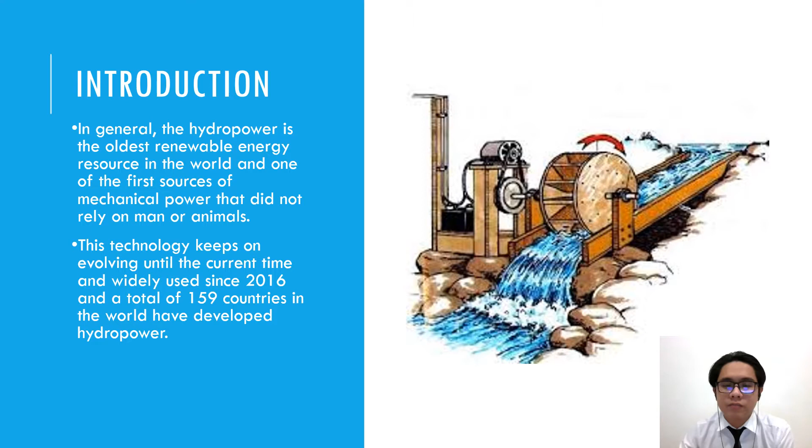This technology keeps on evolving until the current time and was widely used in 2016, and a total of 159 countries in the world have developed hydropower. Hydropower has numerous types of sizes, which are categorized as large and small hydropower plants. The small hydropower plant consists of 4 types, which are small, mini, micro, and pico, and the table below shows the power consumption for each type of plant.

Pico-hydro is mostly applied in rural areas due to its lower power consumption. As for this research, pico-hydro will be focused on as it is more suitable for smaller consumers and has lower power consumption.

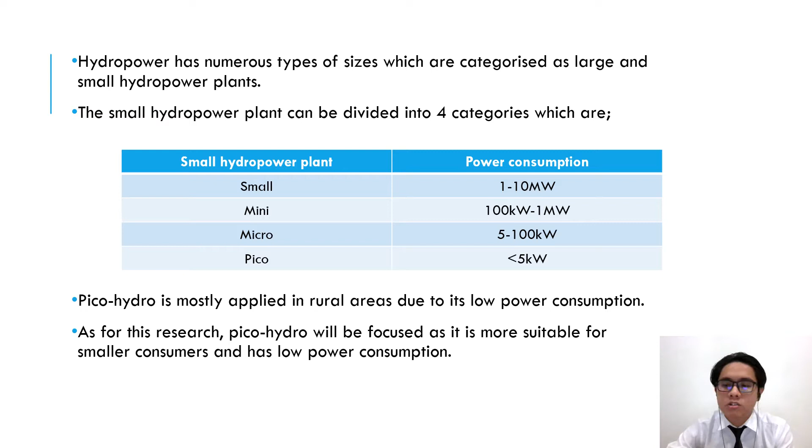This slide shows the problem statement of the current study. The application of the turbulence model into the numerical scheme can produce a huge difference to the simulation results. However, different models produce different simulation results. This is due to the boundary conditions that have been set and also depends on the complexity of the model. It is important to choose a suitable turbulence model which can help achieve the convergence results. With the results, the simulation data obtained will be relevant and also reliable.

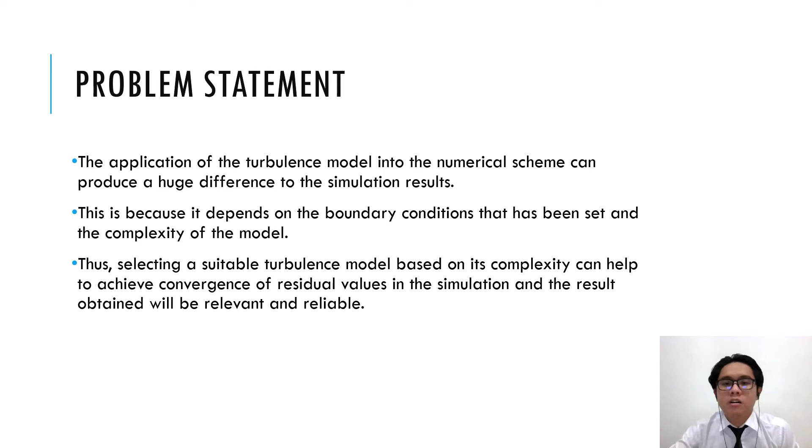In this slide, the objectives of this research are: first, to perform CFD simulation of the pico-hydro and previous mini-hydro design. Second, to compare the simulation result between the pico-hydro turbine and the previous mini-hydro turbine. Third, to observe the effect of the nozzle applied on the system.

This study will focus on performing the CFD simulation of the pico-hydro turbine. A turbulence model is used to determine the convergence result. However, the research can only monitor the performance of convergence at a limited level due to the limited use of the CFD software.

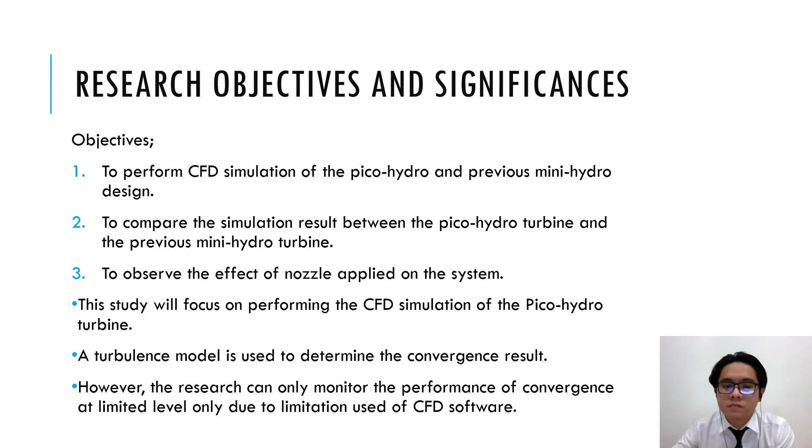For the literature review, first is the Finite Element Analysis (FEA) software. FEA is a program used to solve various complex issues in any scientific and engineering field. Various types of models, such as structures, machine components, or nozzles, can be analyzed using the FEA method. FEA can analyze the behavior of the models in terms of strength, fluid flow, elasticity, and other elements. During the FEA, the boundary conditions are determined, and it is reduced to the understanding of the restrictions on the model without worrying about its mathematical form.

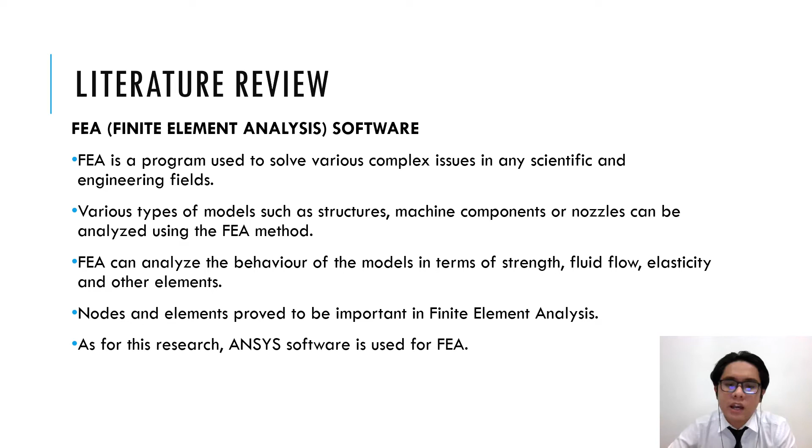It is important to consider the selection of the number and type of finite elements because it has a high impact on the time needed to obtain accuracy and results. It is also necessary to select the appropriate shape of the finite element, which includes the number of nodes on each of its edges. Nodes and elements prove to be important in finite element analysis. As for this research, ANSYS software is used for FEA.

Next is turbulence modeling. As you can see, this table shows the comparison between turbulence methods or models. The main purpose of turbulence modeling is to assist equations to predict the temperature fields, time-averaged velocity, and pressure. With this modeling, there is no need to calculate the complete turbulent flow pattern as a function of time, as in large eddy simulation and Reynolds-averaged Navier-Stokes equations. As for this research, the Spalart-Allmaras model is used as the turbulence model.

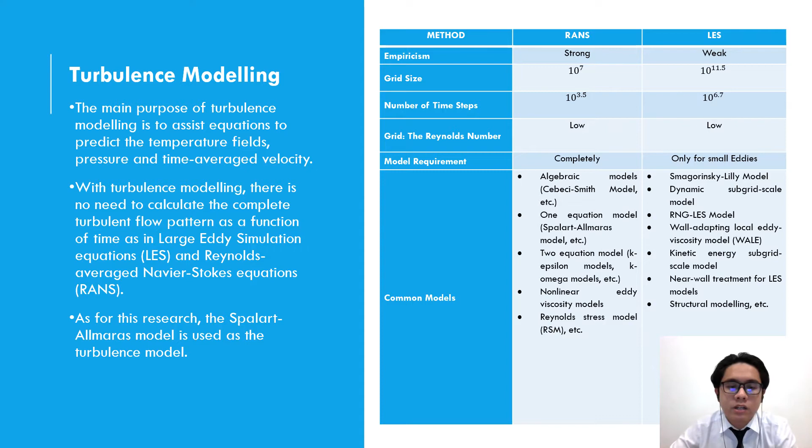For this slide, it shows CFD convergence using residuals. As you can see, this figure shows an example of the residual monitors. It is the main tool for judging convergence because it can monitor the solution of the basic equations for the CFD simulation. The simulation includes equations like pressure, turbulence, and momentum. After that, the solver will conduct iterative solutions for these equations. As a result, the difference between the solutions of these equations can be seen throughout the residuals plot.

There are various root mean square, or RMS, residual levels: 10 to the power of -6, which is tightly converged, 10 to the power of -5, which is well converged, and 10 to the power of -4 and -3, which are loosely converged. As for this research, the RMS residual level of 10 to the power of -3 is used due to the limitation of the software.

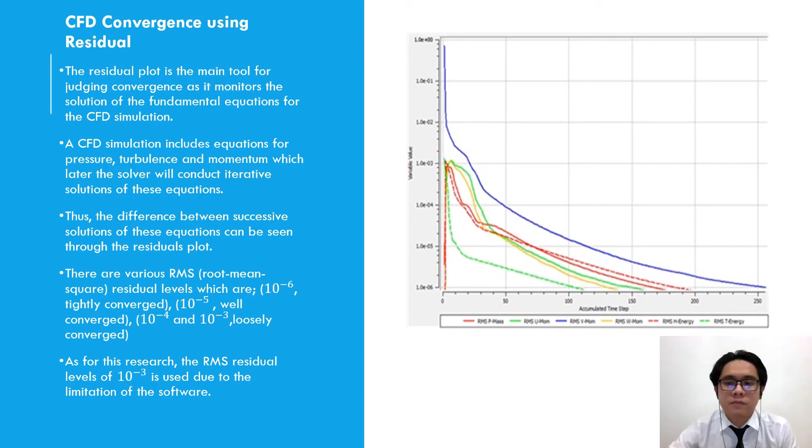The volume flow rate of 0.5 × 10^-3 m³/s is used as the boundary condition at the inlet of the pipeline, with the density of water being 997 kg/m³. Using the residual level of 10^-3, the residual values obtained are converged and the simulation result can be obtained.

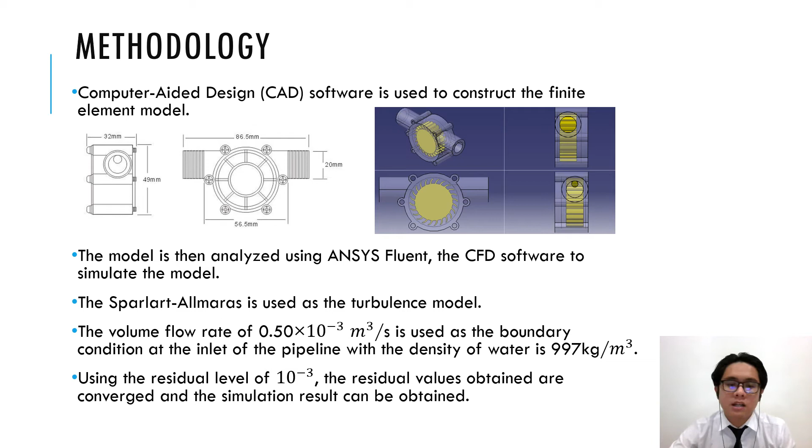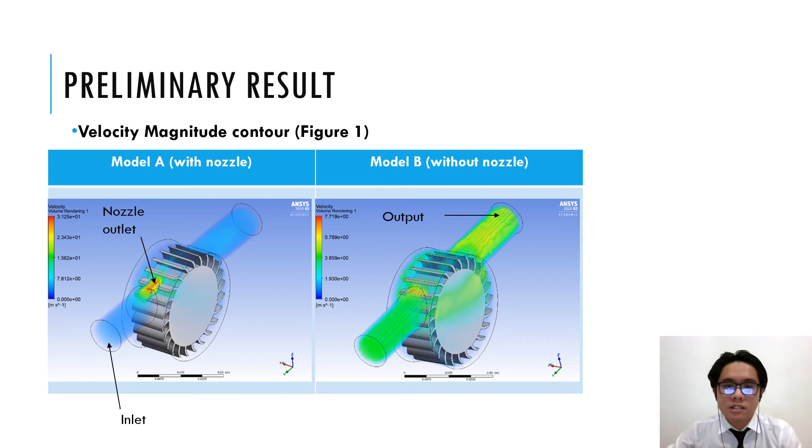As for this slide, it shows the preliminary result, which is the velocity magnitude contour. Based on these two figures, there are two models, which are Model A, which is with nozzle, and Model B, which is without nozzle. It can be seen that the average velocity for Model A is higher compared to Model B. This is due to the existence of the nozzle that has been applied in Model A.

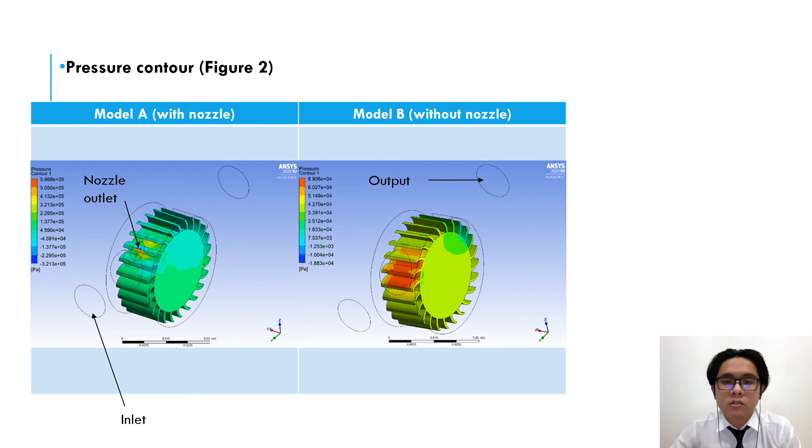Next is the pressure contour. Based on these two figures, we can see that the average pressure for Model A is higher compared to Model B. This is also due to the existence of the nozzle that has been applied in Model A.

Next, we discuss the simulation result. First is the average velocity and pressure of the base model. Based on this table and both figures from the previous slide, Model A shows higher velocity and pressure at the nozzle output. However, Model B has a lower velocity and pressure when there is no nozzle applied on this model. To ensure the efficiency of the blade, the blade is best put around this area. As a result, Model A proved to satisfy the purpose of the nozzle as it produces a higher water velocity at the nozzle outlet than at the inlet.

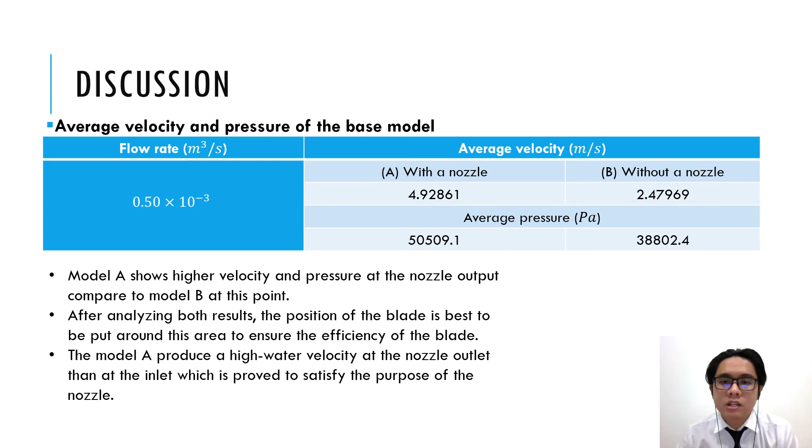Next is the volume flow rate at pipeline outlet. As you can see, the table shows the result of volume flow rate at the pipeline outlet. From this table, we can see a negative value of the volume flow rate. This does not affect the simulation result, as the negative value is due to the outward flow of the fluid.

Compared with the actual flow rate, which is 0.5 × 10^-3 m³/s, Model A obtained a total of 0.02% difference, while for Model B, a total of 0.01% difference is obtained. As a result, Model B produces a better efficiency of fluid flow as it obtains lower flow rate losses.

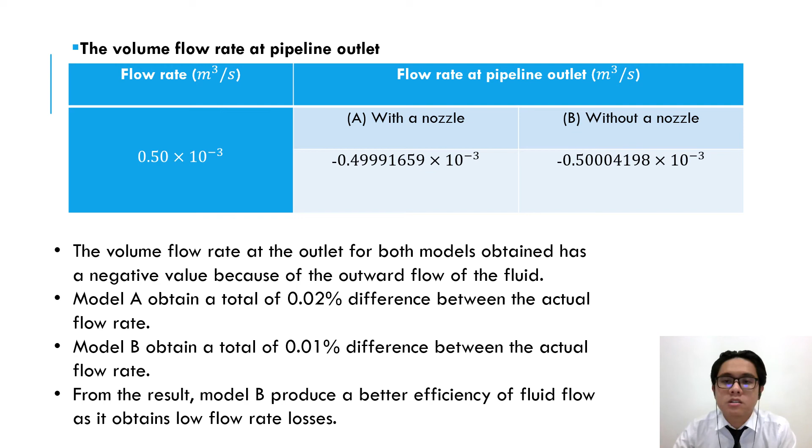For this slide, it shows the convergence result of Model A and Model B. Based on these two graphs, Model A takes around 22 seconds to reach convergence at an iteration of 58, while Model B takes around 19 seconds to reach convergence at an iteration of 46. Both of the models use residual values of 10^-3. As a result, Model A reached slower convergence compared to Model B due to Model A's complexity, and additional work is needed to simulate it.

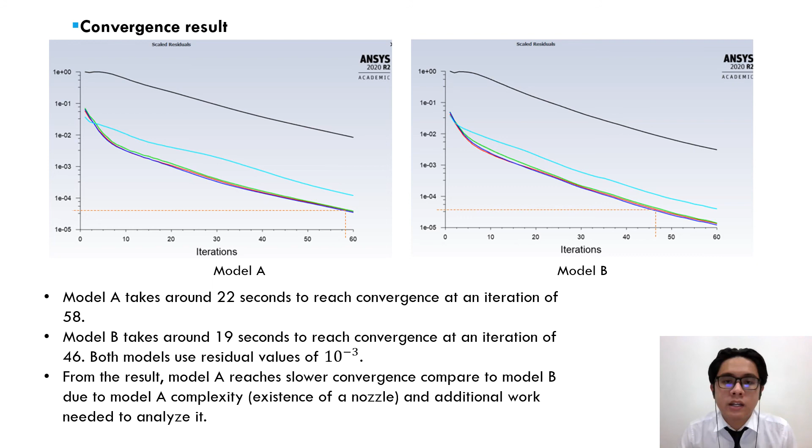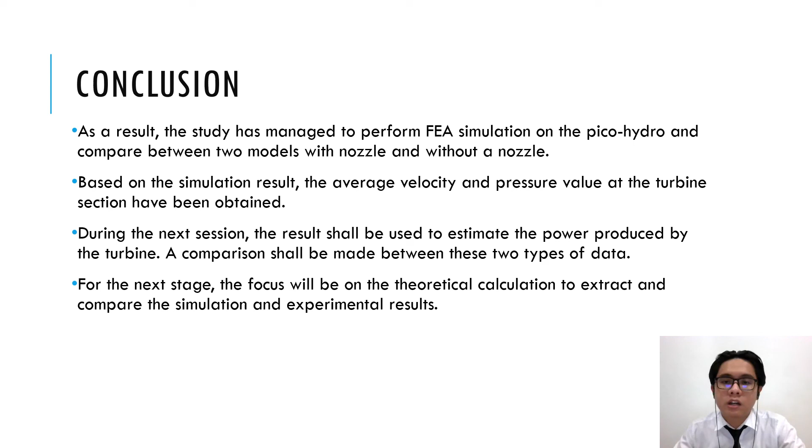To conclude, the study has managed to perform FEA simulation on the pico-hydro and compare two models, which are Model A, with nozzle, and Model B, without a nozzle. Based on the simulation result, the average velocity and pressure value at the turbine section have been obtained. During the next session, the result shall be used to estimate the power produced by the turbine. A comparison will be made between these two types of data. For the next stage, the focus will be on the theoretical calculation to extract and compare the simulation and experimental results.